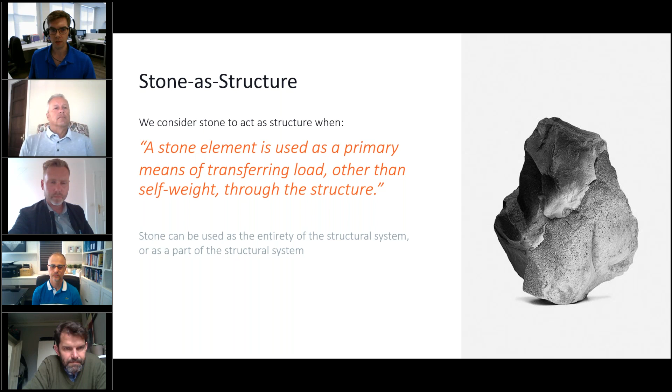To start the case study off, I'd first like to define what we mean at Picco when we say stone as structure. Basically, it's whenever a stone element is used to carry or transfer load other than self-weight or the weight of other stone cladding.

In the case of this mausoleum, the entire superstructure is composed of gray Chinese granite, bearing on a cast-in-place concrete foundation that's on helical piles. The mausoleum is about 30 feet wide by 21 feet deep and 18 feet high, with walls that are 12 inches thick and roof panels that vary from 5 inches to 7 inches, depending on the location.

For this project, our client was originally interested in using solid stone walls, but had considered a more standard roof structure. We were able to work with the client and propose the idea of constructing the entire superstructure, both walls and roof, out of natural stone.

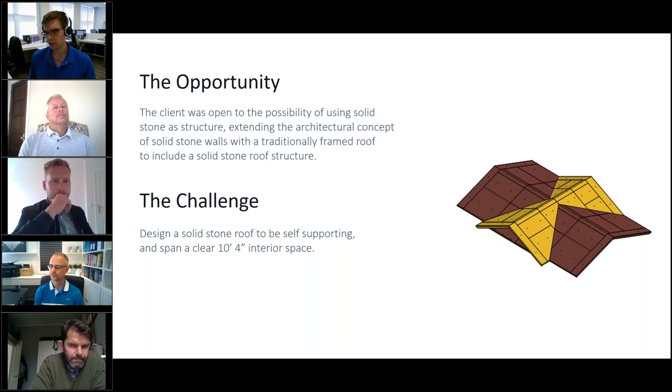The challenge, therefore, was to provide support for the roof such that it could span a clear 10-foot ceiling space. Our solution was to use a series of hidden internal columns that bear down directly on the ceiling panels. This worked well due to the inherent strength of this stone.

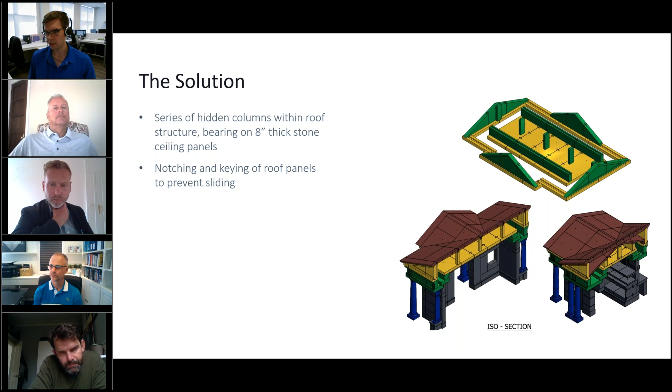A more significant exercise was involved with developing all of the notches and keys in the roof panels and other stone elements that prevented sliding and transferred lateral forces down to the foundations. Our design also made use of various stainless steel pins and cramp anchors that supplemented the stone shear keys and, where necessary, allowed for tying different stone pieces together, such as at the interior corbel, to prevent overturning.

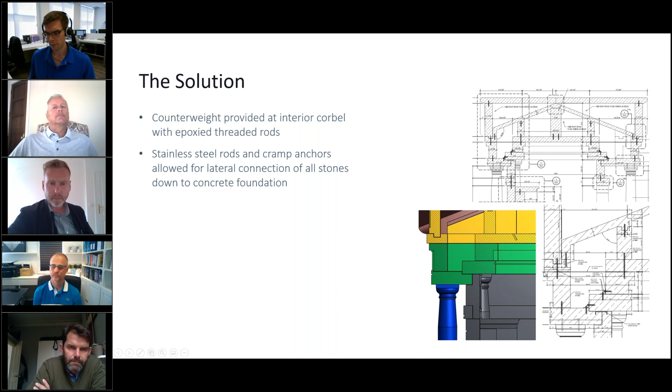The exercise of 3D modeling all of the stone pieces together allowed us to prepare a fully integrated and rationalized design that also helped with water control. In addition to typical sealants and providing a vented cavity, the joints were all designed in such a way that they lapped in order to shed water as much as possible without allowing moisture into the cavity space.

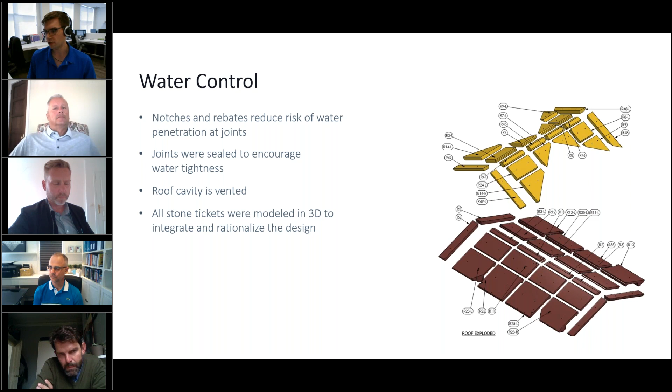Therefore, while this mausoleum is an example of stone as structure on a fairly small scale, some of the information and strategies could be applied to much larger structures, particularly in how 3D modeling allowed us to prepare an integrated design for all of the stone elements.

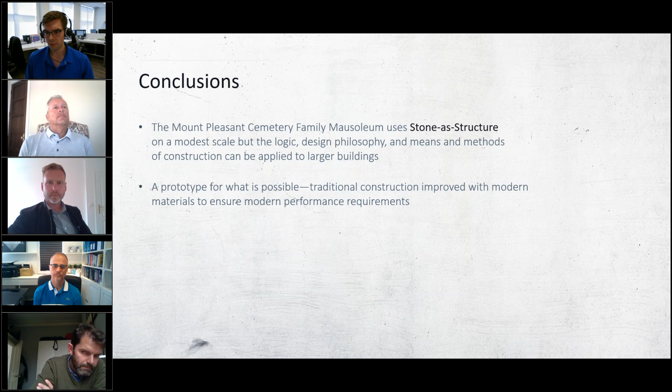Now the second case study that I'll present involves a rather different scale and function of stone as structure. The Belmont University Performing Arts Center is located in Nashville, Tennessee, and the entire perimeter is clad with Indiana limestone panels, which are on a steel structure that also incorporates CMU and steel stud infill walls.

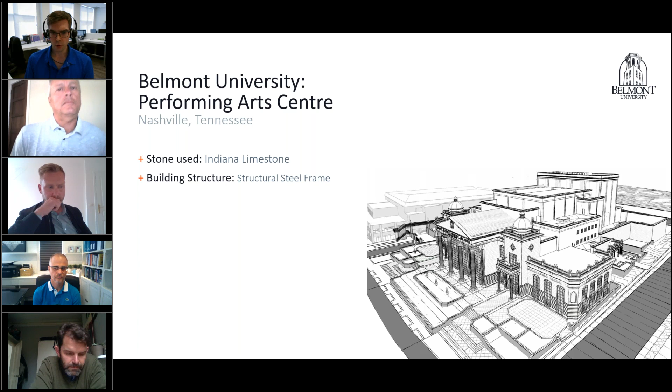For this project, stone is used as structure in the form of load-bearing columns, which take weight from the steel structure above. There are 3 sizes of columns on the project: 9-foot tall, 25-foot tall, and 45-foot tall, weighing up to 104,000 pounds for the largest size columns.

The columns were used to support the north and south porticos, the tower balconies, and the main entry portico respectively. There are 9 load-bearing small columns, 4 medium columns, and 4 large columns on this building.

The columns were tasked with transferring vertical load only, with components of dead load, live load, and wind load. And the design loads ranged from 23,000 pounds for the smallest columns to 146,000 pounds for the largest columns.

The structural challenge here, however, was not the applied weight, but the anticipated movement of the steel frame, which was up to 1.65 inches, and in some cases was mainly due to thermal expansion.

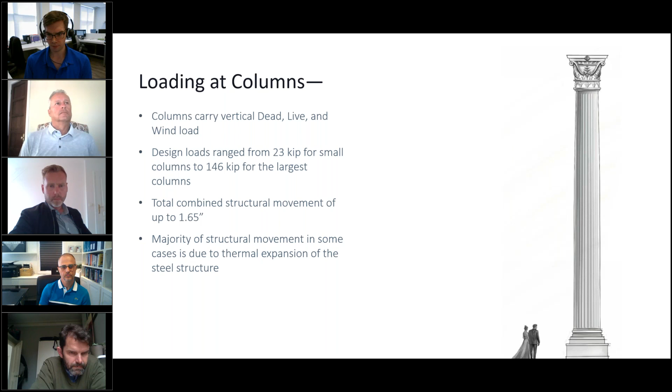The problem with that movement is that depending on the type of assembly used, our calculations showed that that amount of deflection could cause cracks at either the stone or the joints. And this was due to a combination of the stiffness of the columns, but also the relatively low flexural strength of the limestone. So the columns would crack before they would deflect.

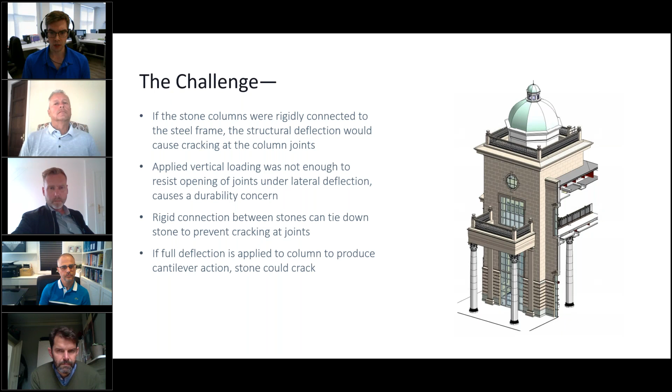Therefore, our task was to figure out how to alleviate the stresses caused by the building deflection. The solution that we settled on in this case was to use a system of neoprene pads that could elastically deform laterally and absorb the building movement without transferring large lateral forces down to the stone.

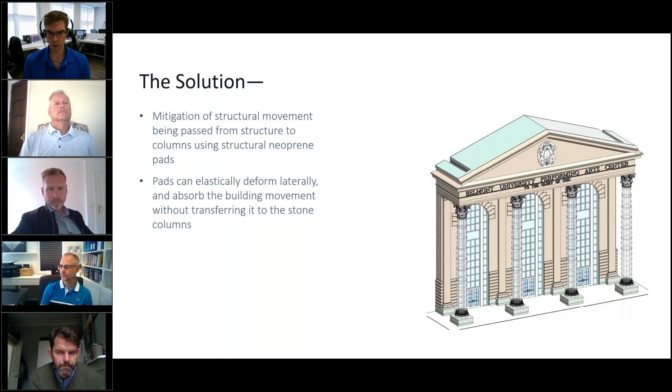This slide coming up shows a detail of how the bearing was provided with the neoprene pad connecting the steel structure to the stone. And you can identify another consideration that needs to be made when integrating structural systems, that being the requirement of providing adequate bearing for the steel structure on the stone, because especially with softer stones such as limestone, a steel member that bears on a fairly small point could easily crush the stone if it's not properly engineered so as to adequately distribute that force.

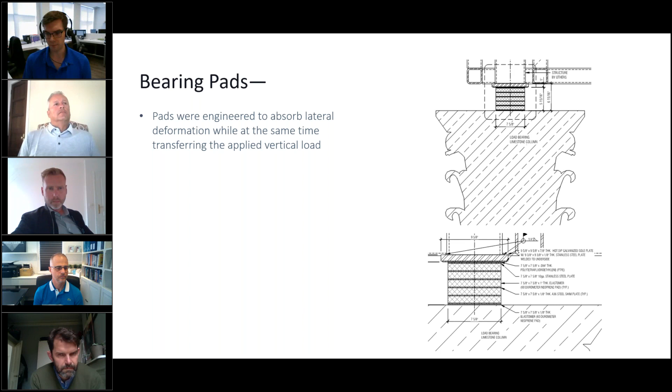In conclusion, despite the large loads that pass through these columns, they were all properly proportioned to avoid buckling. The challenge was actually in connecting the steel system to the stone columns so as to ensure compatibility. The project needed to use a fairly complicated detail, which could have been avoided if the lateral deflections had been reduced.

This is why it's important to consider how structural stone will interact with other structural elements from the beginning of the design, so that the benefits of stone can be fully realized.

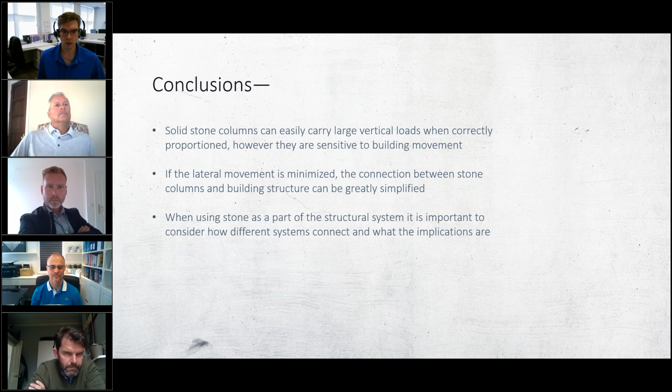Now I'll pass the screen back to Karl for the third case study. Great, thank you, Matthew. So I'm Karl Doucas.

I'm here to talk to you about the house in the ravine, but more specifically, the special feature stair we executed with an amazing team.

The title Stairmaster refers to both the home owner, who revealed to me during a tour of the residence that despite his prosthetic leg, he enjoyed using the 4 staircases in his home, which I thought was awesome. And it also refers to Steve Webb from Webb Yates, whose firm has truly defined some new standards for what a stair can and should be.

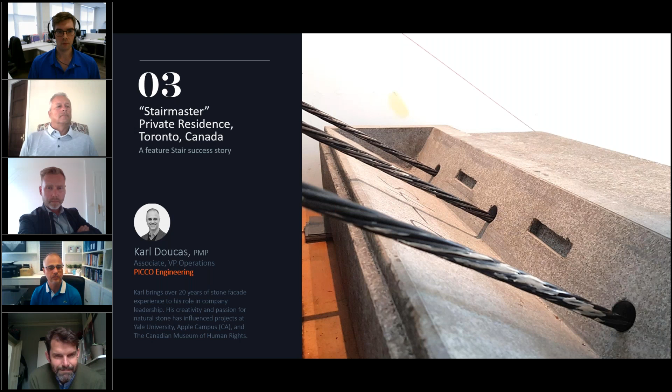So we worked closely with his team in delivering this project. This was a historic property and house amidst an urban ravine in Toronto. Peter Clewes was the architect responsible for a major renovation to the property that included substantial use of natural stone, and our project, a feature stair extending from the lowest level up to the main kitchen and pool terrace level.

There were 3 main expectations for the project.

Our client required a turnkey solution for the stair, so we did something we had never done before. We proposed a service inclusive of engineering, material sourcing, fabrication, and installation. This was a critical decision that we believe streamlined the coordination and closely controlled the technical execution.

We had to use G684 basalt to match the extensive interior floor finishes, and we did not have a lot of experience with this material, so some unknown factors in terms of material suitability were top of mind. Our client expected a cantilevered tread design that would extend out from an existing rubble stone wall, but they also wanted it to be simple and economical.

Sure enough, after studying the project, we proposed and were accepted to proceed with the eventual solution, a solid tread post-tension stair design. And we were happy that it went that route.

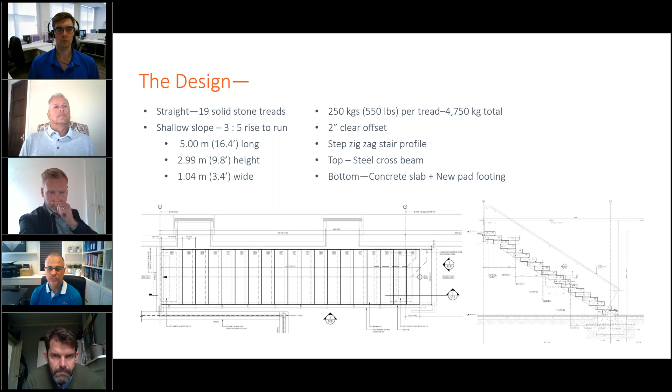So, material sourcing. From the outset, sourcing was a challenge. The G684 basalt was a Chinese government controlled material and supply was low from various quarries we contacted. We were lucky to find the material we needed after multiple sources fell through, but it was critical to understand what we had found. We did our own ASTM testing of samples prior to purchasing the full quantity.

C97, C170, and C880 tests were done by the NSI lab in Ohio. The critical test driving the stair design was compressive strength. Preliminary design determined that the minimum value required was 113 MPa, with average results coming in at 188 for both wet and dry conditions. Density, or bulk specific gravity, ASTM C97, was another key confirmation which would feed the load criteria, and tests indicated 187 pounds per cubic foot for this.

Absorption C97 was also done, but less impactful for our interior application. All tests performed well with very small variances, which confirmed the consistency that we wanted. A threaded rod pullout test was also performed for assessing guardrail design.

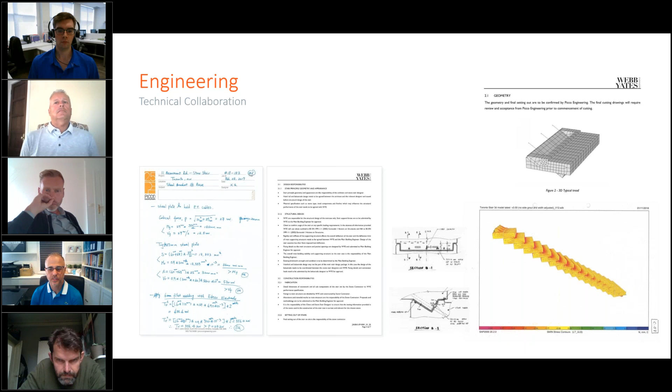Central input to our analysis was the stair geometry, together with the stone test data, which set our modeling drivers. The stair design, having a long and shallow slope, induced a higher bending moment with increased compressive stresses between the treads. This would require a heavier force specification for tensioning the steel cables during installation.

The general concept was to nest each successive tread to the next by way of a shear key. To create this monolithic beam action, we used continuous post-tension steel cables. In this case, 3 half-inch diameter, 7-wire, low relaxation strands with ASTM A416 grade.

Webb Yates took the lead with modeling and stress analysis, and it was an iterative process to achieve optimization. It was tricky to balance the design considerations and the required performance. We did tweak the overlap of the treads a bit to ensure continuity of the strand and shear key geometry, but we were setting a high bar for our fabricators with respect to tooling detail of the treads.

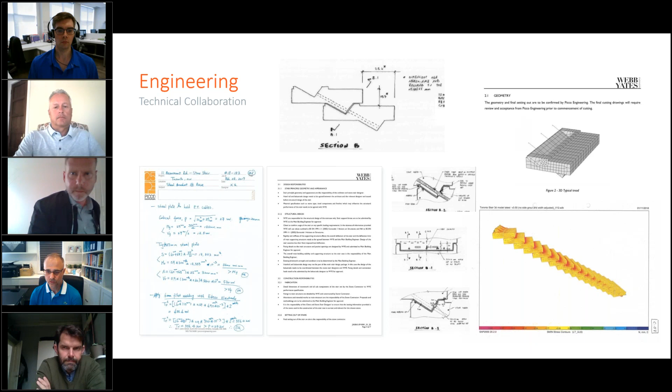Procedures for material prep and installation instructions were just as important as the engineering design, all executed by the Webb Yates team. We at Picco engineered the new pad foundation and the anchor plates at the top and bottom of the stair. We also reviewed and certified all mutual calculations and vetted the required construction materials.

Shop drawings were developed for installation and fabrication drawings for each required component, including the stone and anchor plates. Hoist beam and scaffold drawings were prepared as well. Tight tolerances and little room for error demanded super clarity and quality through our documentation.

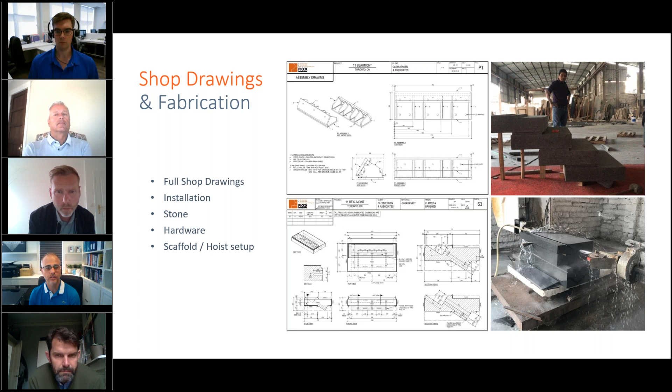Fabrication was done in Fujian, China, with traditional low-tech equipment and hand methods primarily. Shop progress was monitored through virtual reviews and inspections, with on-premises QC by Picco representatives prior to shipping. In preparation for the install, a temporary wood crib support stair was built using laminated wood members.

Our friends at Precision Stone masterfully installed the stone. Each tread weighed roughly 250 kilograms, or 550 pounds. A simple raised hoist beam was used to guide each tread into place. Precise and sequential steps were followed meticulously to ensure cable hole alignment and the 3mm joint requirements.

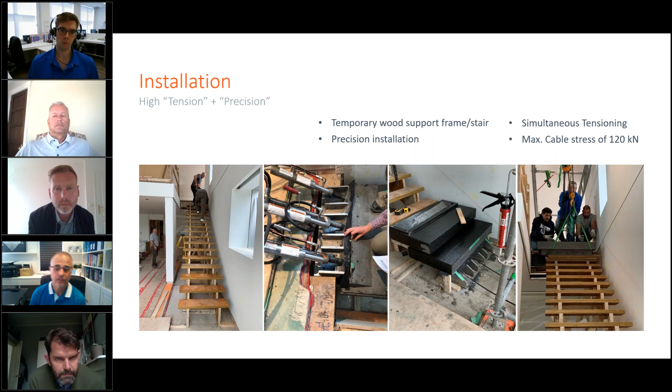You can see the robust steel base plate design here, connected to the foundation. Tension cables were fed through each tread as installation progressed. Finally, each strand was hydraulically and simultaneously pulled with 10 kilonewton increments up to a maximum of 120 kilonewtons. That was our final target design tension, at which point each cable was locked in.

So if we did everything right in design, fabrication, and install, the last step was a formality. We removed all of the temporary support, and the stone was floating for the first time. That was really amazing to see.

We followed a load test sequence to confirm our design and desired performance. 3 deflection gauges were placed on the underside of the stair surfaces, including the beam above. Sequential loading and deloading cycles were iterated, in this case with CMU blocks, to record the stair reactions.

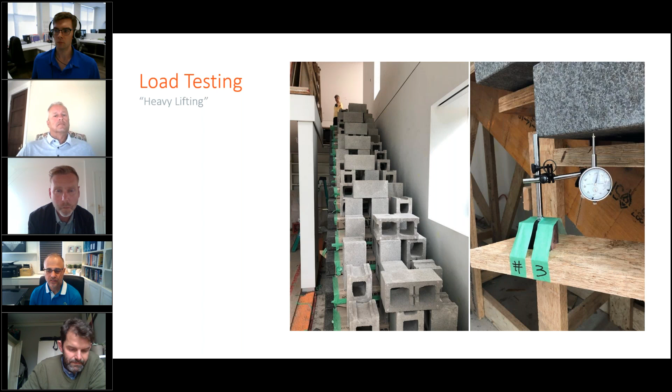Our observations confirm that at our greatest CMU load of 3.15 kPa, or just over 3,500 pounds, the stair only deflected a maximum of 0.673 millimeters at the midspan, and a tiny 0.051 millimeters at the top beam support. This was amazing to witness and a validation of all the hard work.

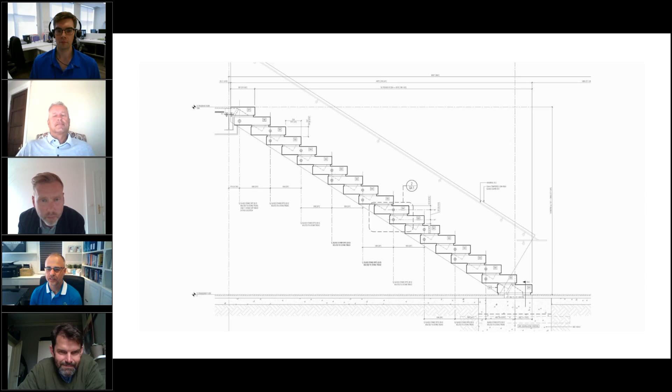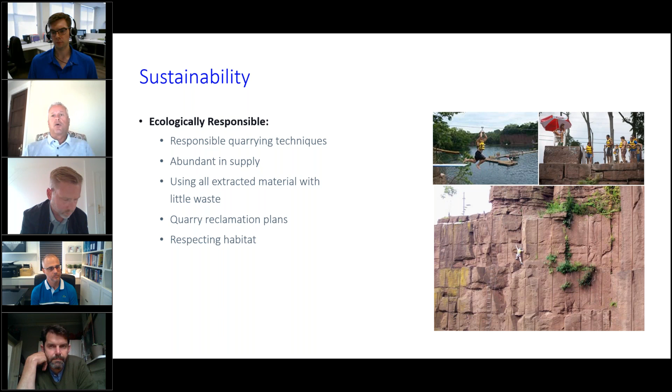When we look at ecological responsibility, it really promotes responsible quarrying techniques. We know there's an abundant supply of stone out there. A big focus is using as much of the extracted material as possible and minimizing waste of the raw material. A quarry reclamation plan is a huge part of it - what's going to happen at the end of the life of the quarry, what's the land use going to be, and also respecting the habitat during the quarrying and lifetime of the quarry, and also after. So these are some of the ecological focuses.

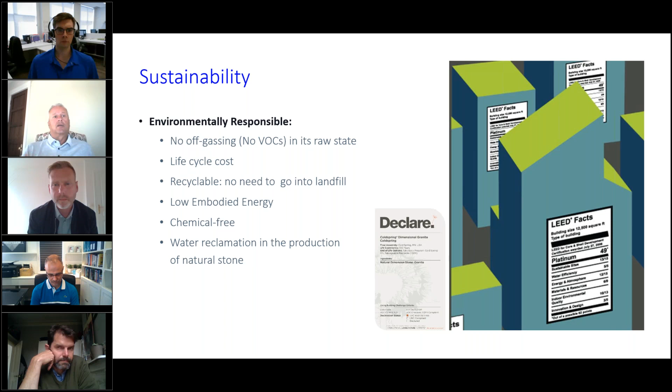From an environmentally responsible standpoint, we know it's a natural material that does not off-gas VOCs. Life cycle cost is very low. It's obviously recyclable - it's coming out of the earth, it's a natural material, very low embodied energy, and it's chemical free. Water reclamation is also a big part of the program, because water is a big component in the fabrication, so reusing and recycling water is a big focus as well.

The other thing it touched on is social responsibility and the human aspects - finding companies that are giving back to their communities, really focusing on health and benefits of the employees, adaptive reuse, and safety throughout the entire process.

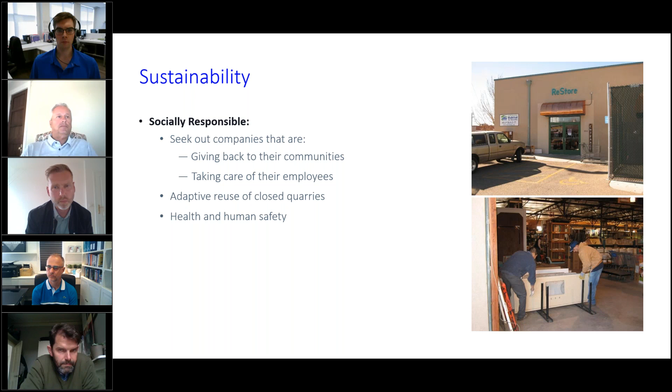The Natural Stone Institute also has a fantastic dimension stone design manual. It's available for download for free on their website, and it's a great resource. I strongly encourage people to download it. It touches on the physical characteristics of different types of stones, specifying installation methods, both interior and exterior, and maintenance as well. So it's a fantastic resource to have in your library.

I strongly recommend it. One of the other big initiatives right now is education, and they've got several different ways to get CEUs on the website. There are webinars that they're working on, and online courses that have been developed that you can take on your own time. So again, I really encourage you to go on the website - there's an educational program there, and it gives you a program of all the available courses and educational tools available for you.

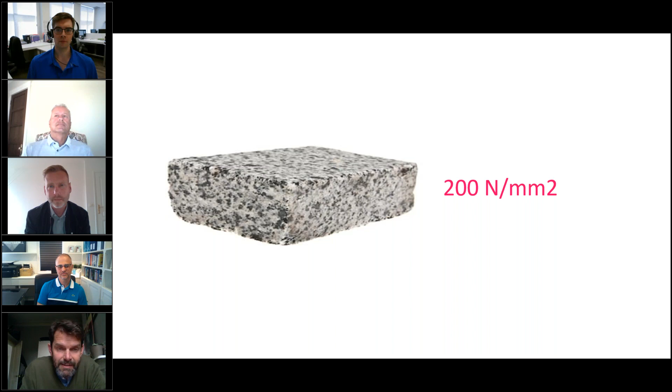There's a lot of stone in the ground, and the volume used in edification is very small. Usually, we dig up stone - we would dig up a piece of granite like this at 200 newtons per square millimetre, maybe we dig up some limestone. We crush it using a lot of energy, we get a lot of gas, and we burn the limestone with clay to make cement.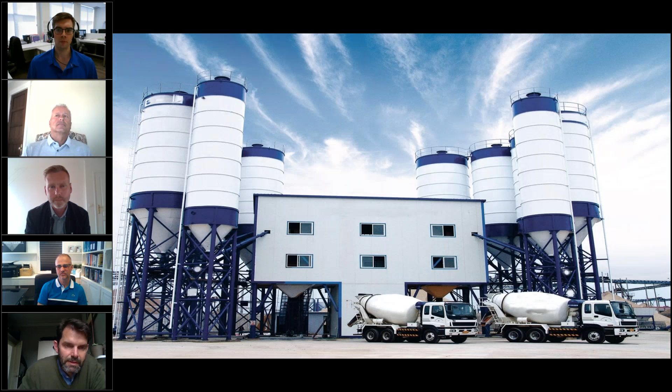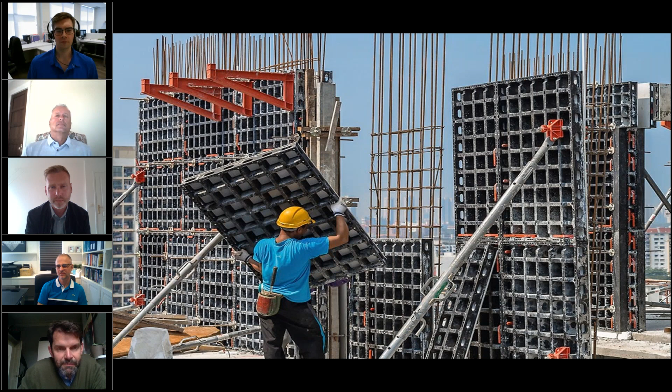Cement works. We send that all off to a state-of-the-art batching plant. Mix a lot of water into it, mix a lot of sand into it. Actually, sand is limited, which is quite surprising. We form it up, we reinforce it, we put formwork around it.

I have a very slow connection here. These slides aren't ticking over as fast as they're supposed to.

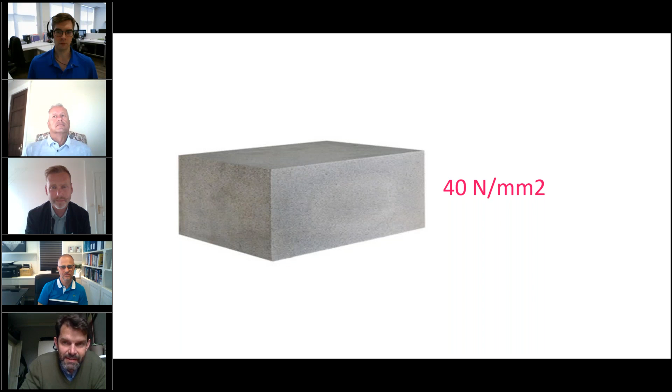At the very end of that, we end up with a piece of concrete with a strength of about 40 newtons. So it occurs to me that it might be better to use the stone in its raw state than to go through all of those industrial processes and end up with something which is actually inferior to what you started with.

We are interested in the swings and roundabouts of using different materials. So this slide is looking at a beam that spans 2 meters supporting a 1-ton car. A fairly small, typical application, looking at different sections that you can use to perform that duty.

On the top row, we're looking at softwoods, steel, and post-tension stone. On the top row, there's equivalent sizes - they're all strong enough, like 2.1 millimeters of steel, which is very effective. The middle row shows the equivalent stiffnesses, and the bottom row shows the carbon footprints per meter run for those beams in those different materials.

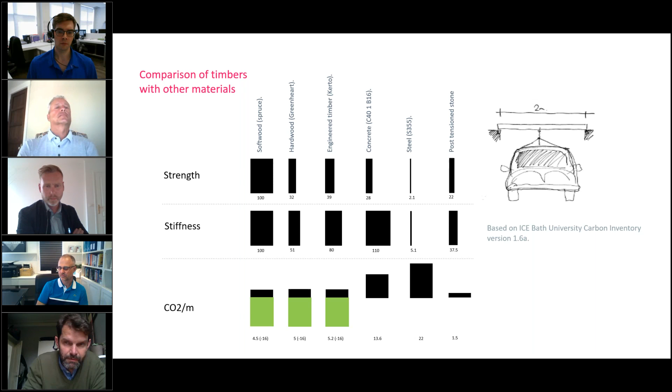You can see if you use a steel beam, even though it's incredibly small and slender, it's actually using 22 kilograms of CO2 per meter, while the post-tension stone one is only 1.5. Timber is a good environmental solution, but that also requires quite a lot of energy in its production. It isn't as strong as stone, so you get a relatively higher carbon footprint for the initial use of timber.

So, well, quite counterintuitively, stone is a really good material from a sustainability perspective.

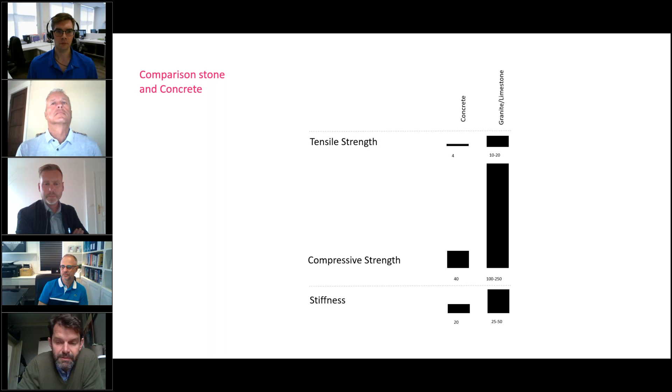Quite often, the stones we use in the UK - I guess the stones you're using over there in Canada, granites and limestones - are much stronger in compression and much stronger in tension than concrete, which is really useful. So we have to put far less reinforcement into stone because of its tensile strength, and because it has a reliable tensile strength, whereas concrete doesn't.

The issue with stone, or the thing that I think probably scares most practitioners from using it, is the fact that it's a naturally occurring material and it's not homogenized in the way that steel or concrete is. So you have a slight unpredictability in the material properties, and we have to do quite a lot of testing.

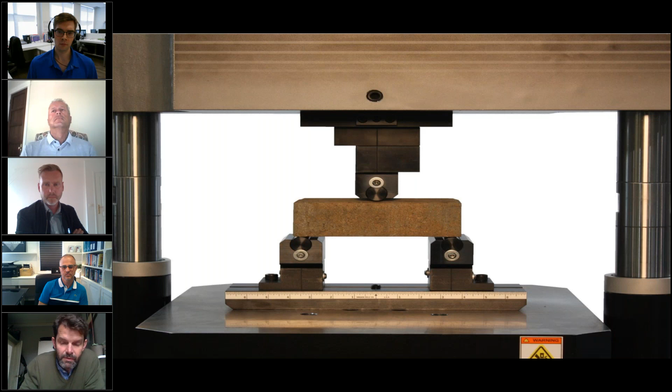Whenever we're using stone for different applications like staircases, we do a lot of tests to establish how strong it is. We came into stone design by designing staircases.

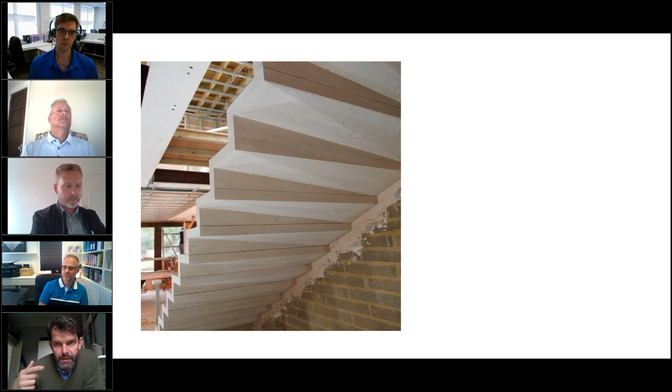We were designing traditional stone cantilever staircases like this, and we were doing other more refined versions. This is a modern version where we're cutting out low stress stone. In this case, the stone is completely unreinforced, and it's using a kind of torsional reciprocation for its support.

We did a lot of versions of these kinds of stairs. Working with a stone masonry company, they were limited to selling staircases where the flight sits adjacent to a wall. So as long as the stair is next to a wall, anyone can sell this kind of staircase, but many staircases aren't in that situation. So they were really interested in developing a system for free spanning stone stairs.

So we started looking at reinforcing the stone, how we could reinforce the stone. We're not in any way near to the people who invented reinforced stone - there are lots of examples of it.

Post-tensioning means all of the stone is in compression. Normally with reinforced concrete, not all of it is in compression. With stone, because of its higher strength, the compression isn't anywhere near the ultimate strength of the material, so you get far less creep and shortening. Concrete quite often sags due to long-term creep effects, whereas stone doesn't really suffer from that problem so much.

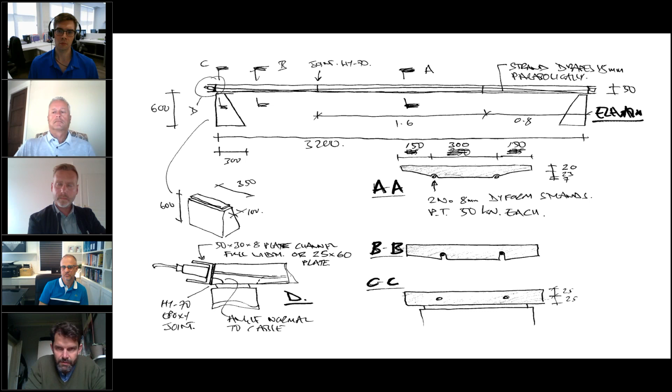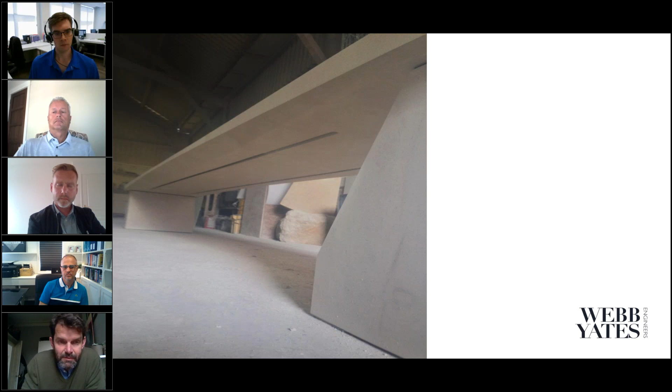So we ended up, in this case, making a 50mm stone plank span 3.2 meters with 2 8mm cables. I think this is very, very effective compared to concrete as a material. We developed that through various projects, and I think we develop ideas in our practice and try to do small jumps at a time. So we went from a small straight flight to a slightly curved flight to a bigger flight. This one was a 270-degree helical flight.

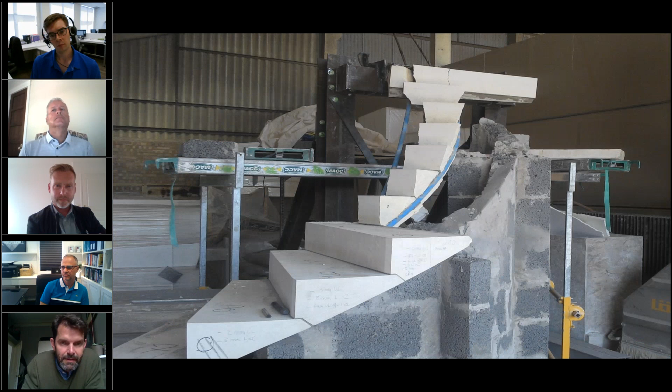This tread is solid stone. There are 2 12mm cables with 12 tons of pre-stress in each cable. We did some prototyping and discovered that the order of tensioning the stone has quite an impact on breaking it. We learned a lot of lessons during this process. This is a stone masonry company, Pierre and Paul, doing a 75% scale test. We solved those problems, resolved them in our analysis, and finally got it working.

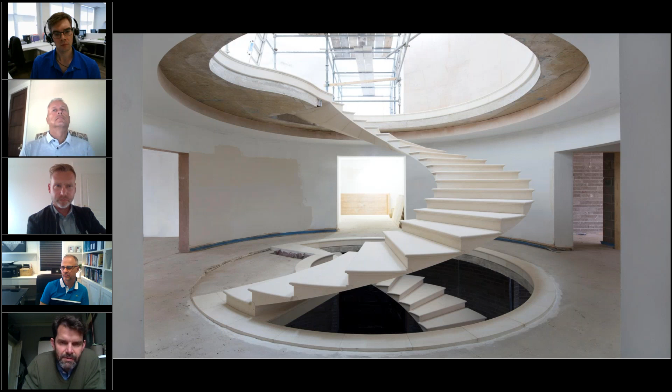We developed quite a lot of analytical methodologies for how we analyze these things, how we analyze the joints in the stone, how we analyze the behavior of the stone itself. This staircase is in Formby, just outside Liverpool in the UK. It's 1.4 meters wide, 270 degrees. We spent a long time calculating this, and when we saw the photos of it, I was really shocked, wanting to recheck all of the numbers. It's a really arrestingly surprising structural thing.

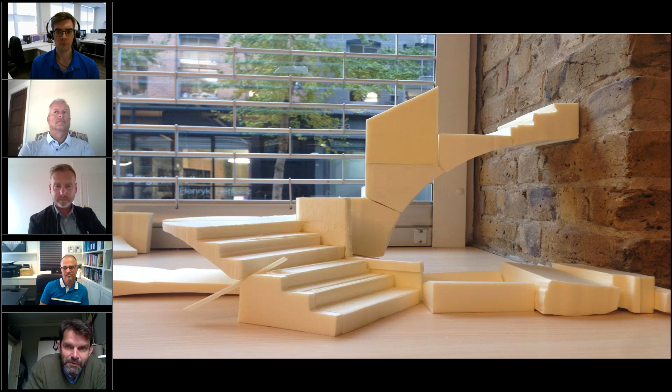We're also interested in what you can do without reinforcing the stone. We're surrounded by 1,000-year-old Gothic cathedrals, tiny vaults, fan vaults, all kinds of things spanning without any reinforcement, big spans, columns, all kinds of stuff in the Gothic era, France, UK, all over Europe. Amazing, without reinforcement, without mathematics, and without analysis.

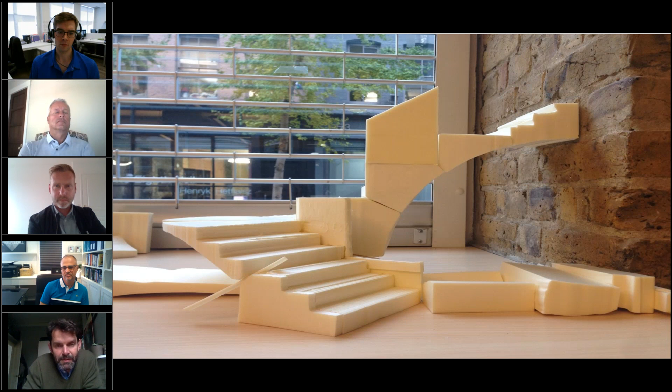It's quite surprising. This was a small staircase that was going to be a steel stair clad in marble, then it was going to be a post-tension stair. We decided to try and make it work unreinforced. So these are our polystyrene models. We thought if we can make it stand up in polystyrene, then we can make it stand up in stone. This would stand up for about 3 seconds until somebody breathed on it, and then it would fall down again. But we basically worked out the static principles for how the treads were going to interlock.

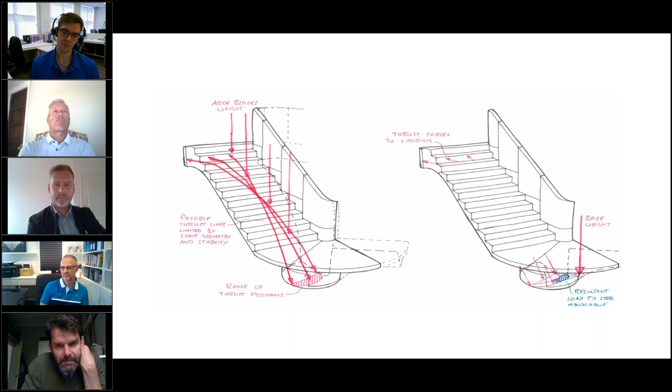So we've got an arch on one side of the stair, a torsional cantilever stair on the other side of the arch, and then an interlock between those landing pieces so that they can't fall out. This is a silver travertine, which is quite expensive. These are the things being erected. I should say all of these stairs have kind of cheesy handrails put on afterwards. We send the photographer out there before the handrails go on because the stone on its own is more interesting. But yeah, that stair, no steel, no ties, no clips, no stainless steel dowels, just stone all the way up, which I think is kind of interesting.

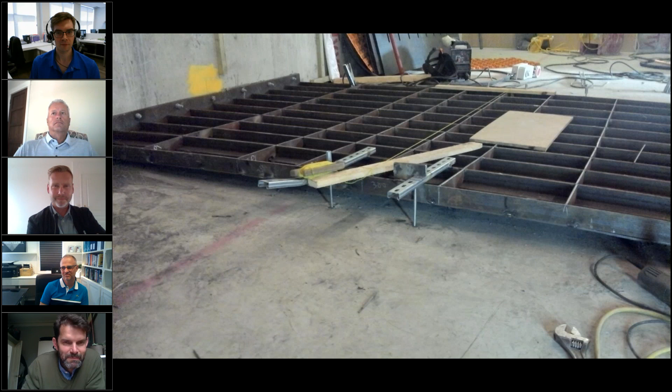I should say this stair cost £750,000, so quite an investment on the part of the client. The stair weighed 16 tons and it was on the 4th floor of a 1920s building on a 6-inch slab, so we needed to support it.

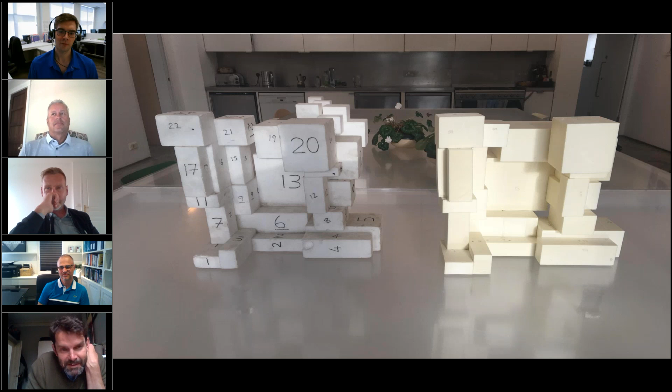There was a solution to put a whole series of beams underneath it that would have resulted in a step at the bottom of the stairs. We tried to find a solution we could hide in a 75mm screed. So this is a 50mm steel waffle plate built with an upward curve, pre-stressed upwards, so that when the weight of the stairs is applied, it goes completely flat and makes contact with the slab underneath. We made this curved waffle, jacked it flat, built the stair, then unjacked it. We were absolutely terrified we'd got it wrong and it was going to ping the staircase back off again, but by hard work and expertise, not by some miracle, we got the numbers right.

This is a sculpture by Antony Gormley. He wanted this thing to last for 200 years, and he wanted it to be demountable and reassemblable. That sounds straightforward enough at the beginning, but then you realize you can't see any bolts, can't leave any visible bolts, can't grout it together because then you can't take it apart again. Suddenly that becomes a massive problem. We thought it was really interesting to try and make it work, try and make it balance without anything else.

So this is his body. You can see his head is the big block on the right hand side, resting on his arm. You can see his leg lying on the floor, his ankle and foot. It's a kind of self-referential thing.

So again, we experimented with the polystyrene block model. If we can make it balance with the polystyrene, then it'll balance with the stone. We did a lot of analysis. We had to very slightly change some of the positions of the blocks. So all of these blocks have to be assembled in a certain order.

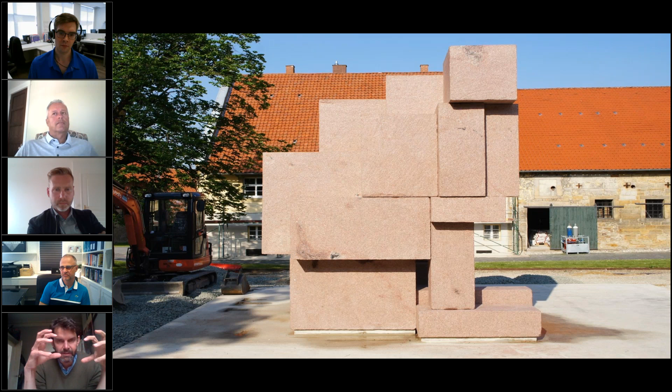They have tenons that project into sockets in the back of the stone. They sit on Lego nipples, arranged in such a way that the stones lean against each other. If you put one piece of stone flat on top of another, you don't quite know where it's resting, and it's going to rock because you'll never get it completely flat. So having three Lego nipples really enforces where the stone is going to sit.

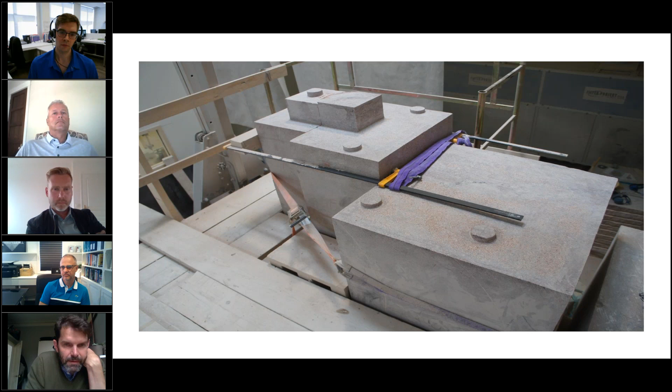So all of this interlocked, it can only be built in one order, and it can only be disassembled in one order. So the whole thing was built without any artificial fixings.

So we really want to start reintroducing stone back into ordinary buildings rather than just doing luxury staircases and novelty jobs. So this is an early version of that.

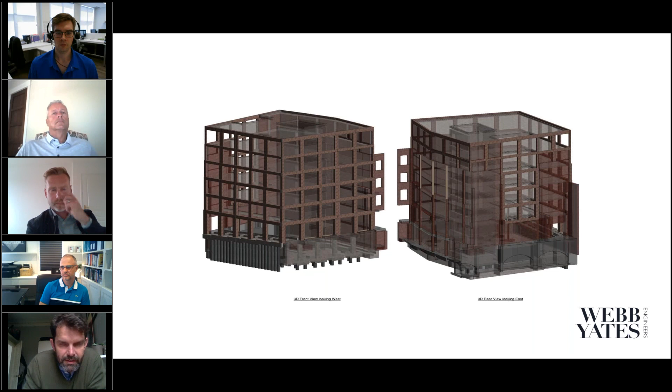This is a concrete frame building. This is our BIM model, so you can see the core shadowed inside there. There are no concrete columns - the concrete frame is supported entirely on an external stone frame.

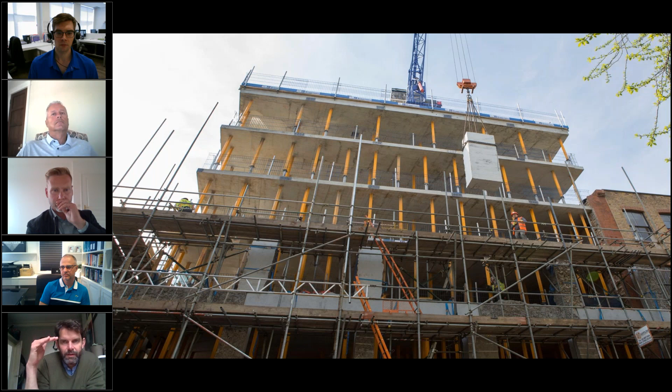That's the concrete frame being built. It's not very expedient to have one contractor building something and then another contractor building the supports - you want to give one guy the site, and give another guy the site afterwards. So in this case, the concrete frame was built and left on props. The stone frame was put up afterwards and erected.

The building was depropped. The aspect ratio of this presentation is a bit squashed - I think that building's slightly taller and less wide in reality. But yeah, those stones, those are the finishes in the stone that came from the quarry.

This is a stone masonry company job. The stones were drilled, feather wedged and split. So you get the split face, you get the wedged face, and then you get the cut face - three different finishes, arranged pretty much randomly around the facade.

The building's entirely supported on that stone. The stones get smaller as they get closer to the top, and smaller at the edges.

This building got a pretty hot reception from the local community - there was a bit of a planning scandal. People were kind of opposed to it, but actually we found when people realized the stone was load bearing, that there's more content, there's kind of honesty in the facade. People like it quite a lot.

And this is a future development thing we've been doing. If you get a Mickey Mouse tile puzzle where you slide the tiles around to make Mickey Mouse's face, a kid's plastic tile puzzle, there are no rails in that puzzle. You can turn the thing upside down, the tiles don't fall out, and the hole can be anywhere. We're thinking this is a really interesting principle - we can do that with stone.

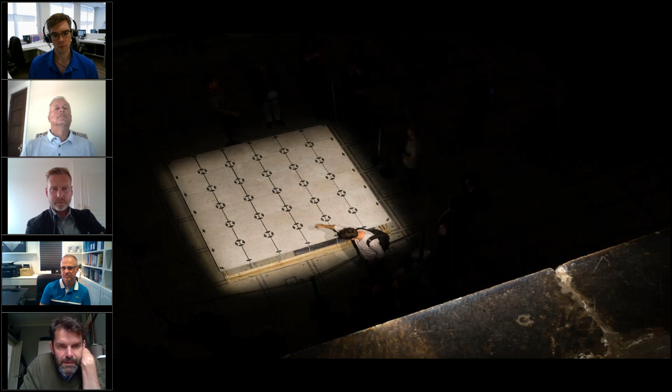So we were invited to submit something for the V&A in London for an engineering season. This is a 3 meter by 3 meter slab made out of 40 millimeter Portuguese Mirabel limestone. It's supported on the 4 edges - it's not supported in the middle.

The tiles are clipped together so that they can't vertically translate. There's no reinforcement or ties or steel work or anything underneath there, so we can span. We built it in about an hour and a half - very thin pieces of stone spanning 3 meters, no reinforcement, no concrete slab, nothing. I think this is a great idea to roll out and solve other problems.

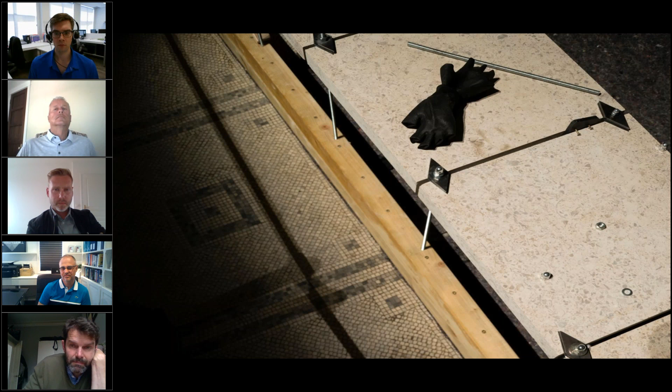Perhaps a solution for a kind of future building system. So we're thinking, in lieu of building a concrete frame, you bring in columns, post-tension stone columns, post-tension stone beams, and make big stone floor plates with thin pieces of stone slab interlocking in this way. So you can have a largely reinforcement-free stone frame, very quick to erect, demountable, reusable, upcyclable, and very low carbon. I think applications like this for stone to start to supplant higher energy materials like steel and concrete is really interesting for us, if we can make them affordable.

Great. So, one second here. Thank you.

Okay, so thank you, Steve. That was a great presentation, education there on some of what you're doing in stone and really pushing the envelope of what is possible. So thank you for that. And now I'd like to invite Bryan Thorburn, Director of Business Development for Europe and Middle East, to say a few words.

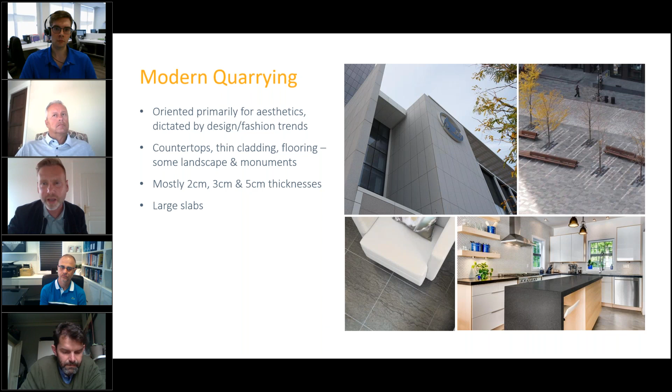Therefore, a lot of stone can be either not used or wasted because it's just not considered beautiful enough to put on the building. This concept of building now with stone as the structure itself takes the focus off the aesthetic and puts the focus back on what stone is good at, which is being heavy, strong, and tough.

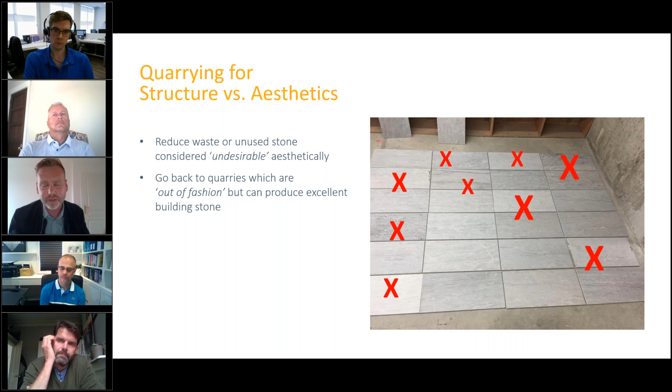When we just look at the aesthetics, here's an example of a stone. It's a beautiful limestone we have from Oklahoma. Some architects will say, yes, let's use it all, we love the stone, we love the range of it. But you may have a design intent where you want it extremely uniform, so we cut out half of the material. It's either not used, or maybe if we're lucky, we can use it on another project. But again, it's all about the fashion, the aesthetic, the final look of the material that the entire industry is geared towards.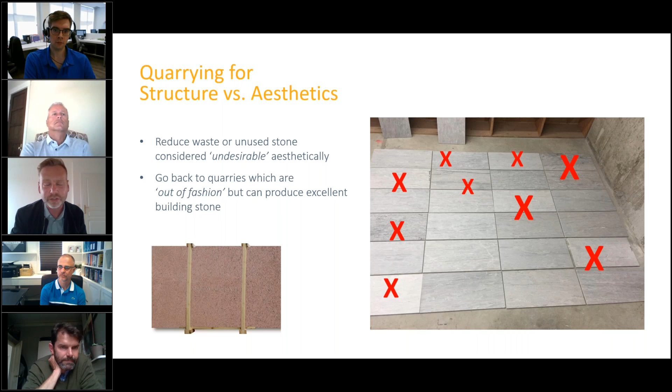We can also look at stone like this pink granite slab, which is a little less in fashion now. But there are some amazing stones structurally out there, granite especially, which may have fallen out of favor. There were very active, productive quarries, and we can start looking at these stones again, less for their aesthetic and for what's stuck on the outside of the building, and more for what's holding up the building itself.

As we see this trend more and more in Europe especially, Steve helped introduce it, along with a number of architects here in France and other parts of Europe who are looking at stone as a structural element again. This has helped us rethink, and maybe even go back to how some masons and installers have done it, looking at how we can start quarrying and making it more affordable. Steve was saying if it gets more affordable, we'll see more use of it. We know we're saving on the carbon side, but what about the financial side?

So this is where we start rethinking quarries and adapting them as maybe they once were, looking at optimizing the format so we actually cut the blocks we need—not necessarily to make a giant slab for a countertop somewhere, but pulling blocks in large quantity so we can build with it now. That's a viable size and format optimized for the quarry itself and for the final product, so there's the least amount of manipulation and cutting to be done. It's going to save carbon, save time, and save money.

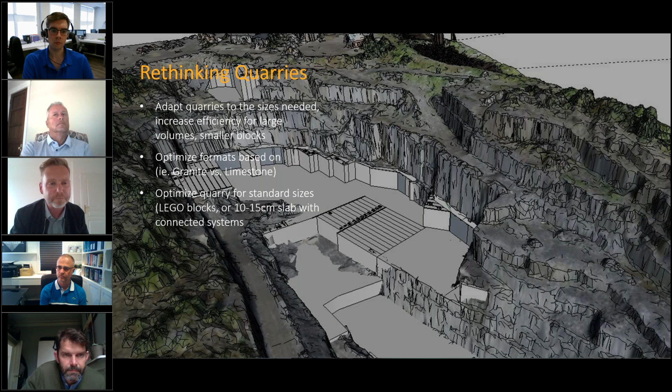We also need to think about how everything's being fabricated once it comes from the quarry. We have a number of manufacturing plants, and each one is adapted specifically for the material or the final product. The industry right now is geared toward very thin material, but it's going to be much different in the case of structural stone. We're going to start getting thicker, whether it's 10, 15 centimeters thick, or up to very large blocks, with a few examples I'll show you as we go.

Again, what we want to do is optimize the production. Any quarry, if it's going to be healthy, we want to use as much material from it as possible, however it's going to be used, and whatever doesn't make it through the manufacturing of larger pieces, we can find more uses for down the road.

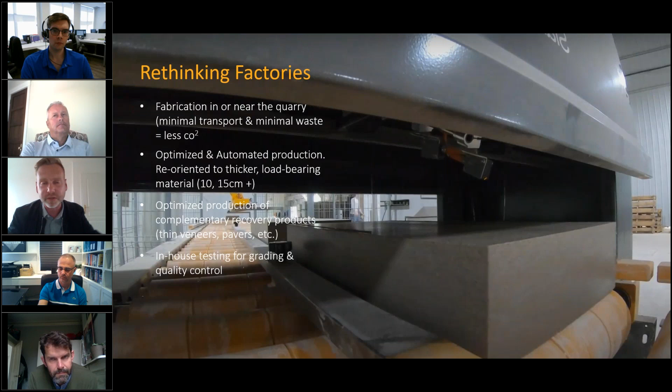The other factor we have to think about in the factories themselves is how we're going to start introducing some kind of protocol for testing. Steve mentioned that one reason some people are hesitant to use stone is its unpredictability. The tests exist—it's a question of how we can start implementing that, not just a test done every 10 years, but something we can do within our factories.

All of that has to be done, and in fact, it's already there. There are already manufacturing processes that are capable or adapted for it. I think of maybe a curbing situation where we produce granite curbing right next to the quarry. Transportation is very minimal, waste is very minimal. We're able to optimize the most amount of material. So it's out there, it's a question of re-gearing towards creating a sustainable way of building stone that's structural stone.

Getting back to the testing, these are the things that we have to look at. These are the things that we owe to the architect, design, and engineering community, because we need to have some kind of accountability and also some kind of assurance that we have a plan to present the material in the best way. There's two different kinds of testing we can look at, as we get more into producing material for structural projects.

One of them is destructive testing. These are the traditional tests that already exist, whether they're compression, flexural, density, and porosity. These are all important tests. A lot of quarries, we found people come to us and say, well, we tried to use this other material, but the best we could get for test data was from 1984 or 2002, and it's all outdated testing.

So part of what we have to do from the industry is to be able to provide up-to-date testing, to the point where we could also implement, for example if we were going to produce the flooring slabs that Steve is looking at, those interlocked flooring slabs which are maybe 10 or 15 centimeters thick, in-house systematic testing where we test every certain number of blocks, whether it's spot check or depending on the zone where the quarry comes from. We actually do our own in-house testing, as well as some verified third-party testing.

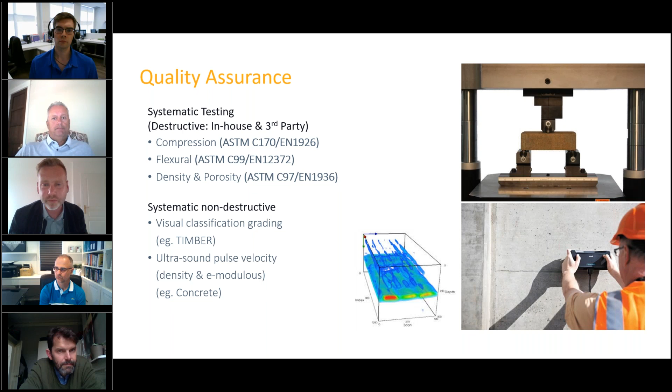So what we owe to those designers, architects, and engineers that are looking to start building with stone as structural again, is to have something we can bring to the table and say, here's what it is, here's how often we test it, and here's how we grade it.

The other thing we owe is to start introducing this idea of standard formats. When you introduce stone, here's a block, do whatever you want with it, that's a great thing. But it's also a great thing to say, here's some basic building blocks that are affordable, that are produced, that are tested, that have some quality assurance, and this you can start building with, and it makes it a lot easier for BIM implementation as well when you've got something standard to start with.

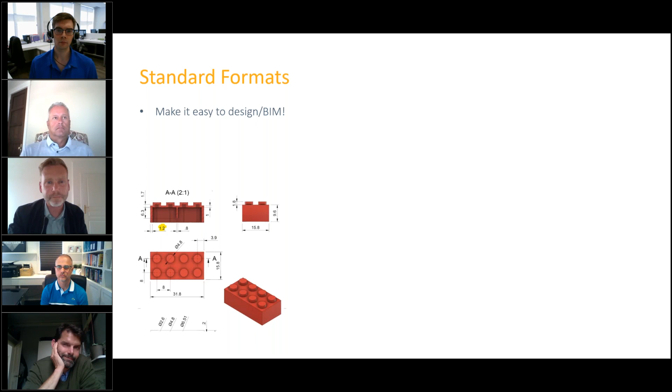Part of keeping those costs down, something else we owe are EPDs. Mike talked about the ANSI 373 certification. This is something that is important.

It's like we've intuitively known in the stone business that we're green. It's a very simple process. We cut the stone, we put a little bit of diesel in the truck to move it from one place to the other, we then cut it and it's done. We're not cooking it, there's no added energy. The embodied carbon in stone is inherently very low.

What we haven't been great at until now is some kind of third-party certification where we can stand up and tell everyone that it's sustainable and clear. That's why having certified EPDs and the ANSI 373 certification is super important, along with ethical sourcing to include the sustainable side but also the social impact. We need to have that for stone, as they do in the timber industry with any other material there is.

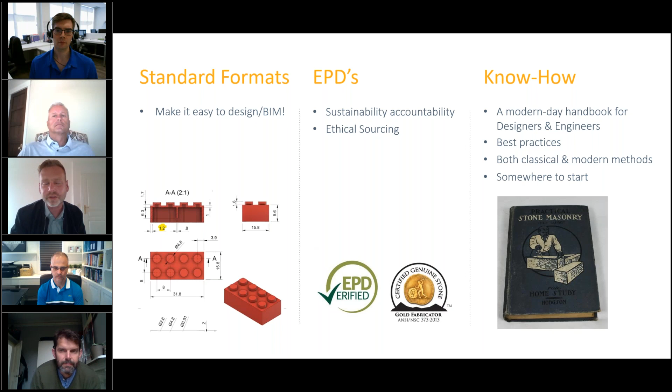The last thing is perhaps the most heartbreaking part: after thousands of years of building with stone, a lot of that knowledge is still held by a number of great people, but it's fallen pretty far behind in terms of basic knowledge of building with stone. What we owe is some kind of starting point—a basic handbook of masonry that becomes standard. It's not something we have now, but it's something we'd like to see put together. I think we're going to need that for it to take off.

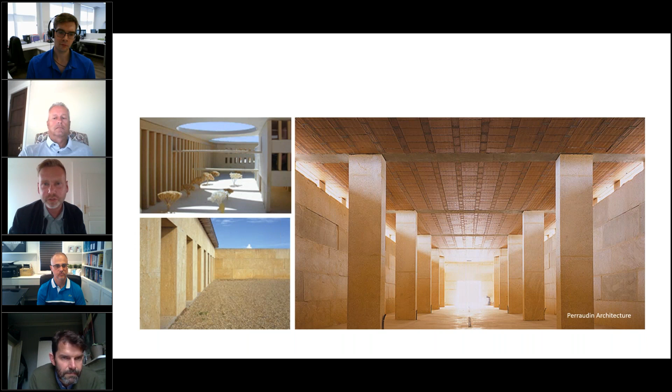Some other projects happening here in France—for example, images from Perraudin Architecture of wineries built with solid structural stone, as you see in several examples. Here's another project done in France as well, part of our building center exhibition. Load-bearing stone doesn't necessarily have to be a 1,200-year-old cathedral; we can see some modern implications too. This building is built entirely of stone with some wood structure as well. Another example of a winery there in France.

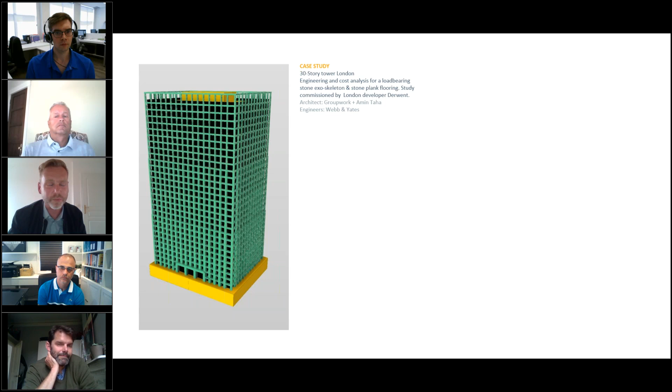Steve showed you the images of Clerkenwell in London, done by Amin Taha and Groupwork. This is possibly taking that to the extreme—we did a case study to see how feasible it would be to put together a 30-story building using this concept of exoskeleton stone, load-bearing stone for the entire structure. They did the study with the 5-6-story version of Clerkenwell, and using stone in that context as the structural material saved 92% of the carbon compared to concrete or steel. The embodied energy savings is spectacular. This was a great study to do a 30-story version, with similar carbon savings.

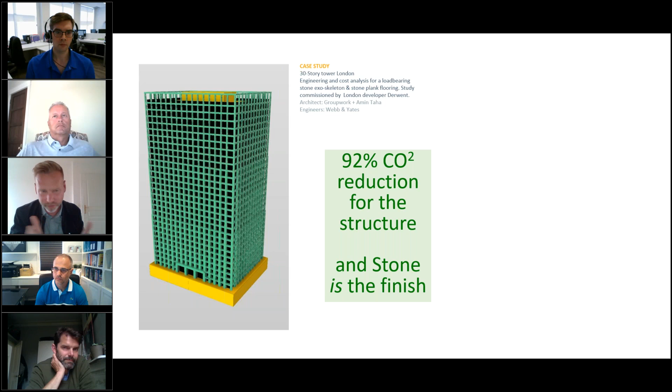And part of the energy savings, but also the cost savings, comes from the fact that the stone itself is the finish. We don't need to engineer the sandwich of every layer with waterproofing and everything in between—the stone itself is the finish. This can help with cost, but also the aesthetics of the building.

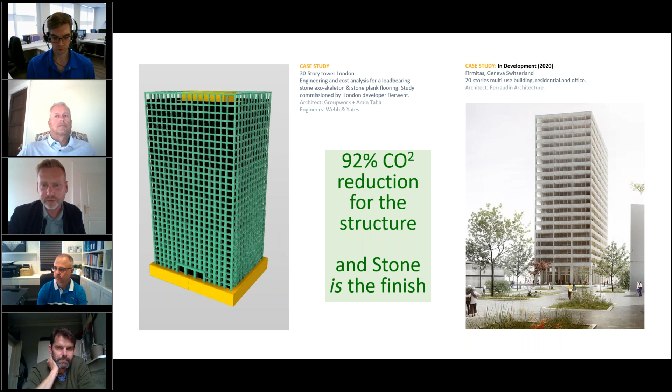Another project in development: a 20-story mixed-use residential building in Switzerland, designed by Perraudin Architecture, 20 stories high, also in load-bearing stone, a little more on the traditional side. That's it—just a few of the things happening here in Europe.

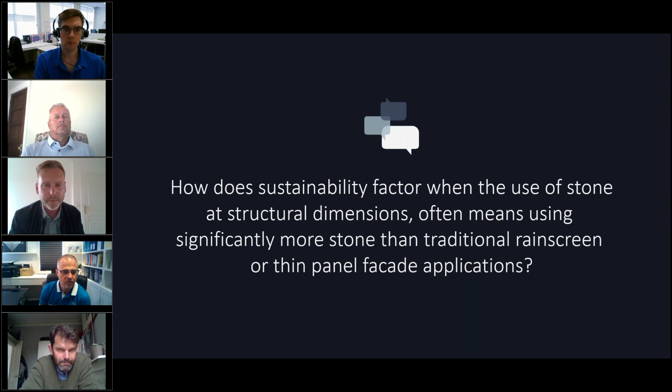I think the biggest challenge is really acceptance by the design and construction community. As Steve mentioned, it was the norm back in the day, and then through the 20s and 30s was left aside and ignored as a building material. So I think it starts first with architects and designers reflecting back on the successful use of stone as structure, and we've got many examples of it throughout the world.

From a technology and industry perspective, as Bryan mentioned, quarries and fabricators may have to rethink some of their processing and retooling, potentially with fabrication shops going to more cubic material handling, which might be different for some of them. Some may find it easy to adapt, but I think that's another area where there's going to be a bit of a challenge for some. Still, I truly believe that if we do enough research on the benefits of going to natural stone in various uses, we'll start seeing more and more acceptance, because there are huge benefits there for sure.